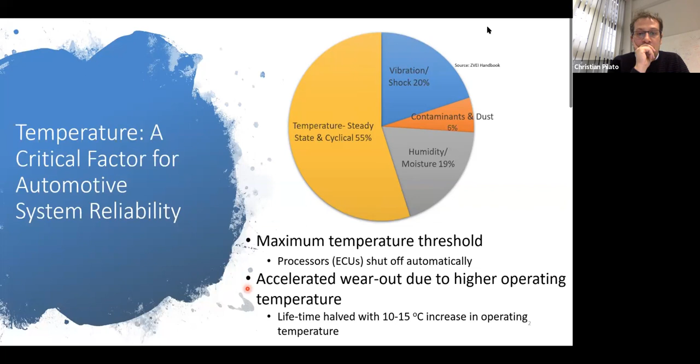So there are two aspects. First, when the maximum temperature threshold is reached by the processor or ECU, it is automatically shut down. Suppose we consider a brake-by-wire system: if you press the brake pedal and that ECU is already shut down, you will not be able to apply the brakes, and you will face a major consequence. Second, if high temperature persists, it will accelerate the wear-out mechanism and reduce the lifetime of the device.

So in this research we consider different problems: how to guarantee peak temperature, how to optimize latency, temperature, and system-level reliability. We have contributed a mathematical model for thermal behavior, and we have considered a genetic method for peak temperature bounding and efficient system-level MTTF calculations.

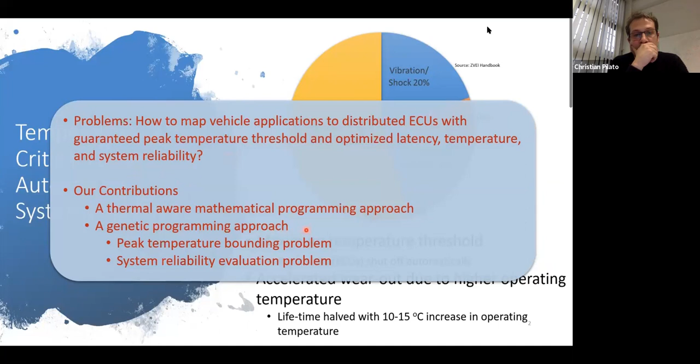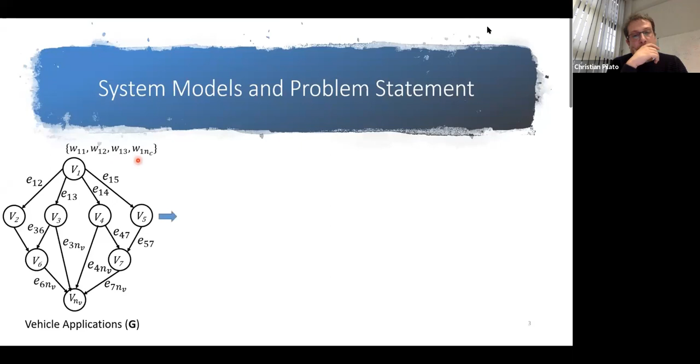For our system models, we model the vehicle application with a task graph, where each node represents a task and each edge represents the worst-case communication cost between two tasks. For each task node, we have different worst-case execution times on different ECUs. We want to map this task graph onto the heterogeneous ECU architecture.

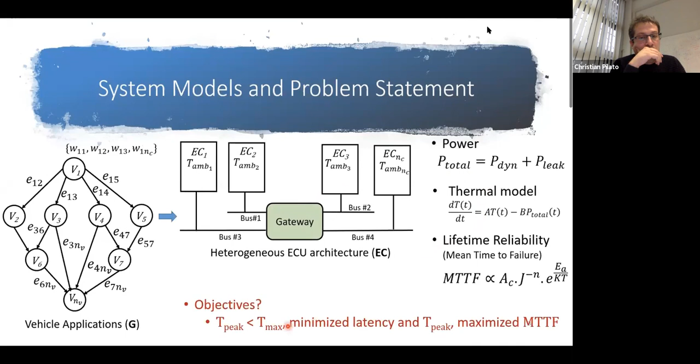We consider total power as a combination of dynamic power and leakage power. We have considered a conventional RC thermal model. We model lifetime reliability as mean time to failure for electromigration. We consider this problem statement: guarantee peak temperature below threshold, minimize latency, minimize peak temperature, and maximize the MTTF.

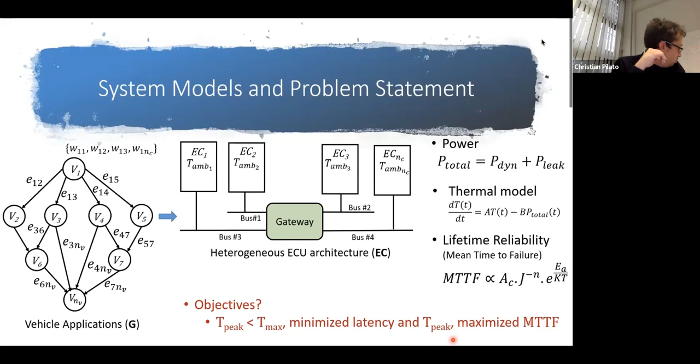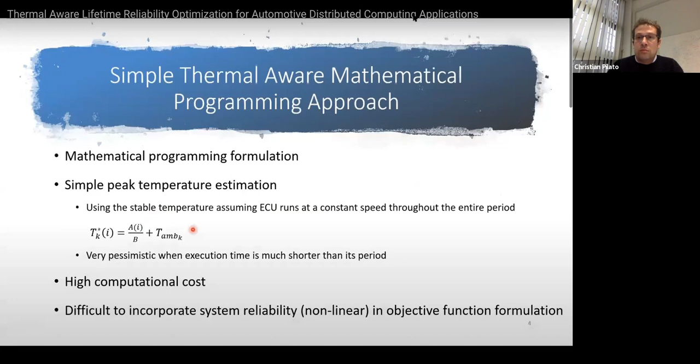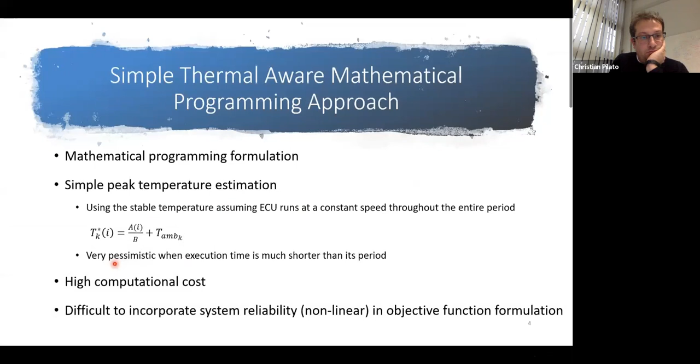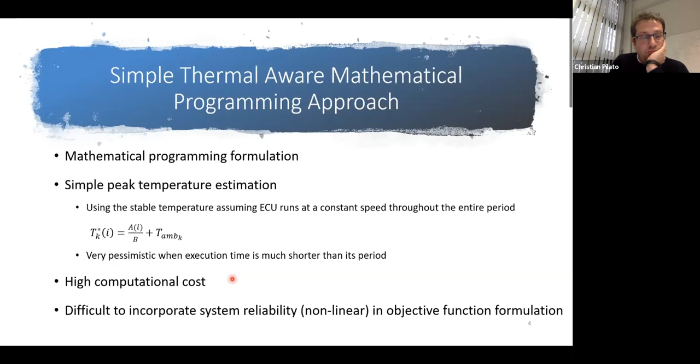So this is our first contribution. Here we have presented a mathematical program for simple thermal behavior, where we consider a constant stable-state temperature for each task and then find the temperature bound. Later on we found that it's a very pessimistic approach when execution times of tasks are shorter compared to the period. Also, it takes a lot of computational time and it's really difficult to incorporate system-level reliability in the model due to its non-linear nature.

To overcome these problems, we decided to go with the genetic programming method. There we consider two problems: how to bound the peak temperature and how to calculate system-level MTTF more efficiently.

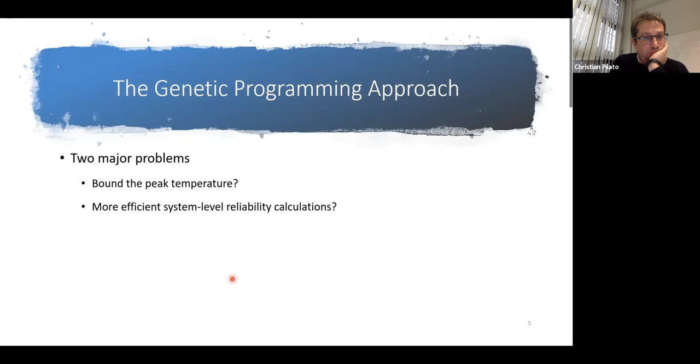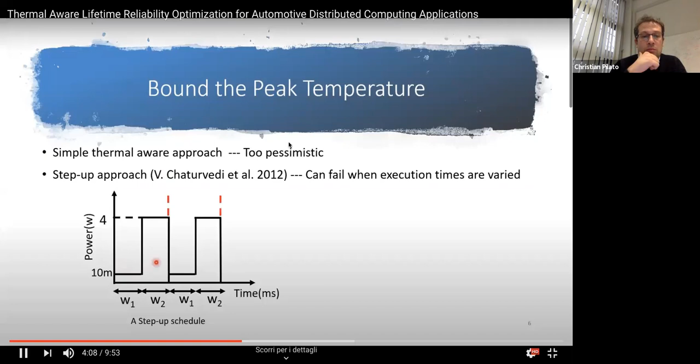The peak temperature bounding simple thermal approach that we considered before is very pessimistic. There is one more approach in the literature, the step-up schedule, but it fails sometimes. Let's see with an example: this is a two-task step-up schedule for two periods. From the experimental setup, we get a peak temperature at this point. Now the idea is, if the execution time of task 1 is nearby zero in the second period, we get a schedule like this, and we get a peak temperature of 94.02 degrees Celsius, which is higher than the peak temperature bound given by the step-up schedule. So it's a failure of the step-up schedule.

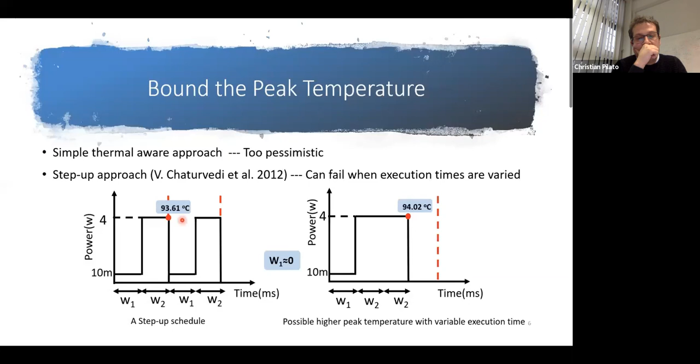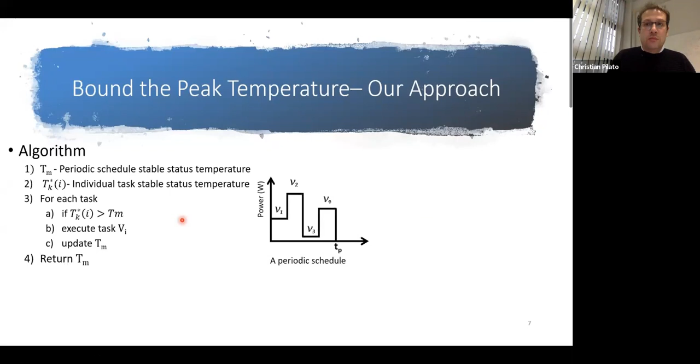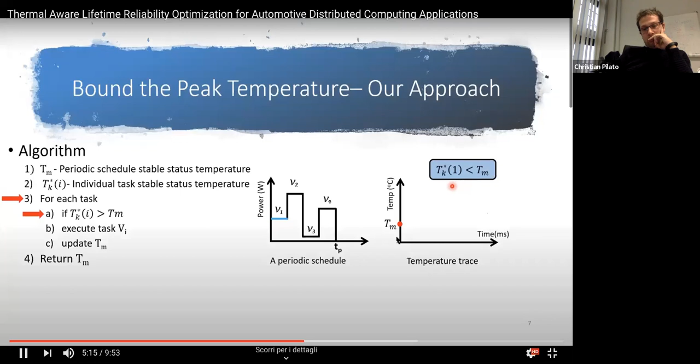To overcome this problem, we have presented this algorithm. Let's understand with an example. Suppose we have a periodic schedule of 4 tasks. As per the first step, let's calculate the stable-state temperature Tm. Second step, calculate individual task stable-state temperatures. Now for each task, let's say task V1 comes, we compare its temperature with Tm. Suppose it is below, so we skip this task and go to task V2. Again compare the temperature; suppose it is above Tm, so as per this step we execute and update the value of Tm.

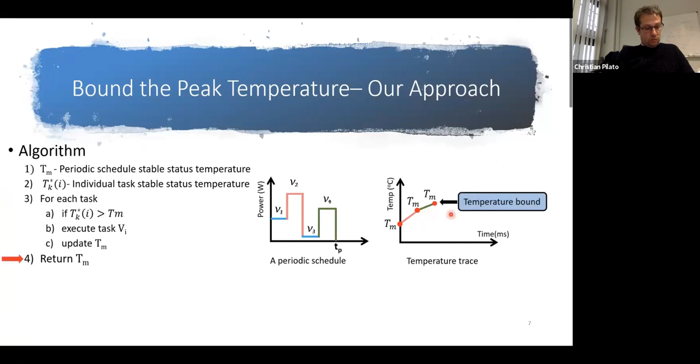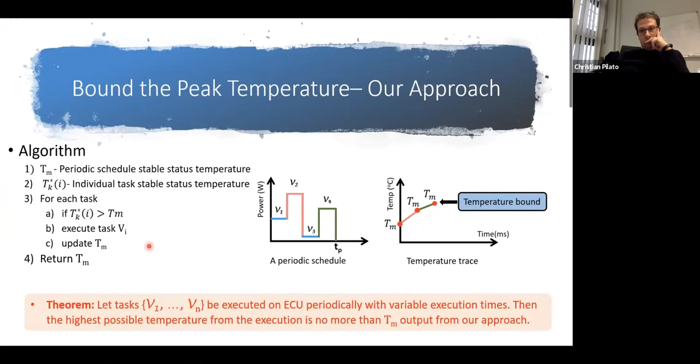Then comes task number 3. Its temperature is below Tm, this updated Tm, so we don't consider this task, and then we go for task number 4. Suppose its temperature is greater than the updated Tm, so we execute this task, update the value of Tm, and then go for the next step. This gives the temperature bound because task 4 is our last task. We have proved this theorem. It guarantees that the peak temperature bound given by this algorithm is high enough to bound variable execution time scenarios.

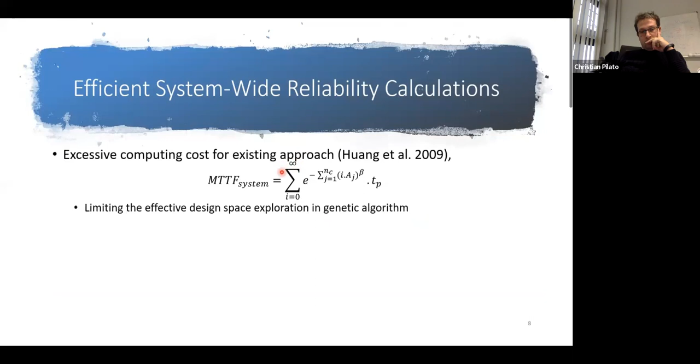Efficient system-wide reliability calculations - this is the existing model. It runs from 0 to infinity, and therefore it consumes a lot of computational time, and it limits the design space exploration. To overcome this problem, we have proposed this new model. It's a very efficient model in terms of time. It's a closed form, and the error between this model and the existing one is just below 0.1%.

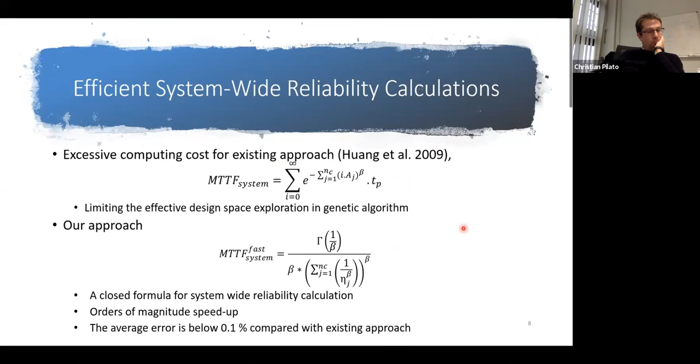Our experimental setup: we have considered 3 ECUs with different ambient temperatures. We have generated task graphs randomly for 10, 15, 20 and 25 tasks. Our power consumption is in this range.

Our testing approaches: we have considered mathematical program for temperature oblivious, where no thermal behavior is considered. Simple thermal approach, where we have proposed earlier. Then we have genetic algorithm for peak temperature bounding proposed, as well as fast MTTF calculations that we have proposed. And the last is again genetic algorithm with the peak temperature bounding that we have proposed, along with the existing MTTF calculations - we call it traditional MTTF calculations.

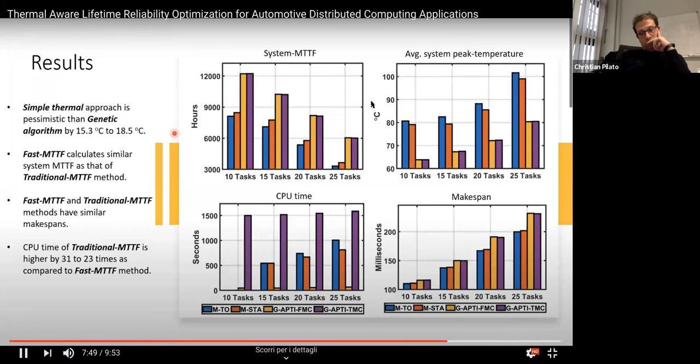So these are our experiment results. Let's see the peak temperature of simple thermal approach, shown in orange color. If you see with these proposed temperature bounding mechanisms, this simple thermal approach has very high peak temperature in all the test cases, so it's really pessimistic.

In terms of MTTF, the method that we have proposed for MTTF calculation and the existing method have almost similar MTTF values for all the task cases. For makespan, the method that we have proposed and the existing one have almost similar makespan - you may observe this for all the cases. But there is a big significant improvement in CPU time for our proposed MTTF calculations as compared with the existing method. You can observe it for all the cases.

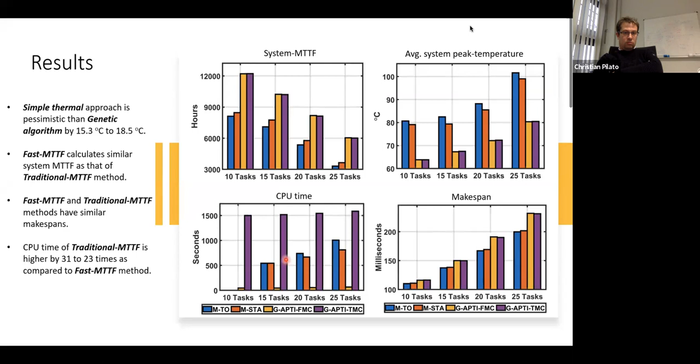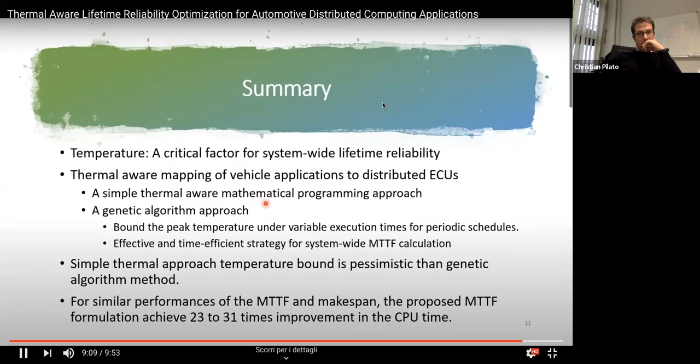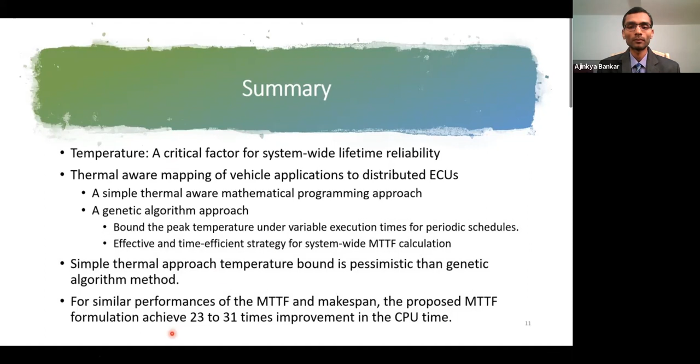So in summary, temperature is a critical factor for system level reliability. We have considered mapping of the vehicle application to heterogeneous ECU architecture. We have proposed a mathematical program; to overcome its drawback, we have proposed a genetic algorithm where we bound the peak temperature very efficiently. Then we have proposed a time efficient method to calculate system level reliability. From our experimental results, we find that the simple thermal approach temperature bound is pessimistic as compared to what we have proposed and used in the genetic algorithm. And for similar performances of MTTF and makespan, our proposed MTTF formulation achieves a significant improvement in CPU time.

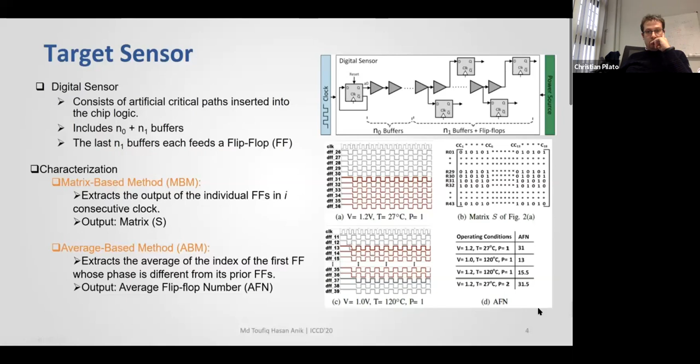Here it extracts the index of the first flip-flop whose phase is different from its previous flip-flops, and then generates the average flip-flop number as AFN. Here you can see that the first phase change is happening at flip-flop 31 for all clock cycles, so the AFN is 31. In this example, it can also experience multiple phase changes, but we consider only the first change, and we found the AFN is 13.

Therefore, we use a dual sensor that operates under the same temperature. However, the VDD of one has a constant shift compared to the other. Then based on the outcome of these two sensors, we can find the voltage and temperature accurately.

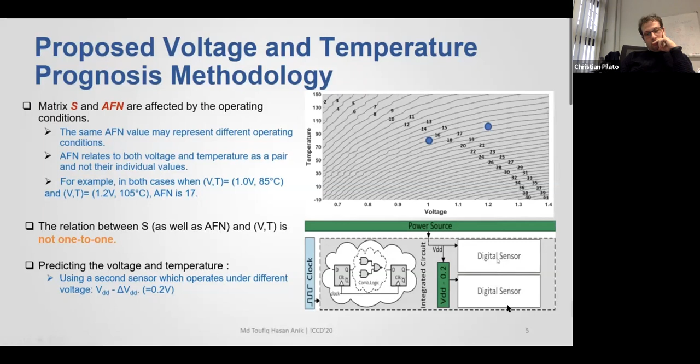This is the setup we use for our experiment. We use simulation data for training the neural network, and we extract the outcome of the sensor during runtime and use it for predicting V and T.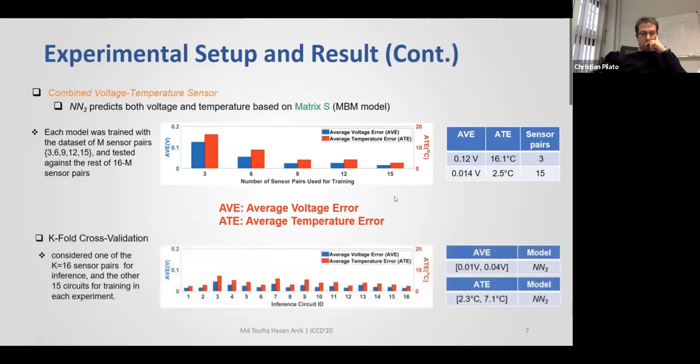We also use NN3, which predicts both voltage and temperature based on the matrix S. Results show that when trained with 15 sensors, the average voltage error goes to 0.014 volt, and average temperature error goes to 2.5 degrees Celsius. Also, k-fold cross validation shows that results are stable over different sensors.

To summarize, anomalies can be detected via sensing circuit operating conditions. The digital sensor associated with neural network can predict voltage and temperature. Results show that process variation does not impact the assessment, and voltage and temperature can be predicted with good accuracy with this framework. Thanks for your patience, please drop your questions, we will be happy to reply soon. Thank you.

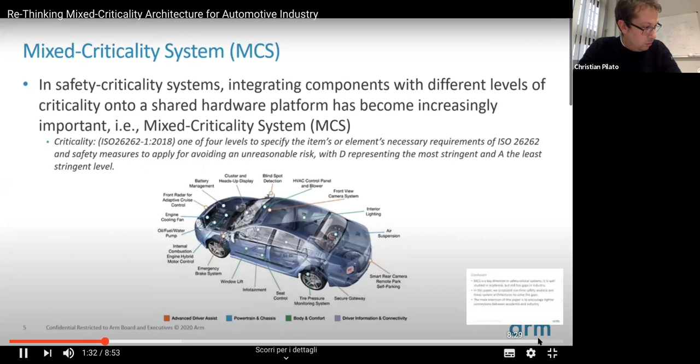Take automotive systems as an example. Nowadays, the electronic system in a vehicle is very complicated, which can be simply classified into chassis control, body control, and driver information systems. In industry, the development of these functionalities is under different requirements, which is also called different criticality levels. Currently, these different criticality functions are implemented in separate chips. They are more like a distributed system.

However, the main trend of the future is integrating all these functionalities into a single chip. This is mixed criticality system.

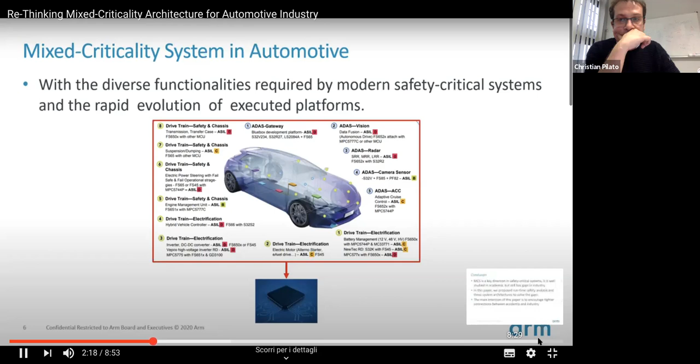Nowadays, MCS is well studied in academia, but is difficult to implement in industry, as the theoretical models do not always consider industry standards and practice.

Now let's see the state of the art in academia. The state of the art research regarding MCS is triggered by the real-time system community, in which meeting real-time requirements is key. To meet the real-time requirement, getting an accurate WCET is the first step. WCET means the worst-case execution time.

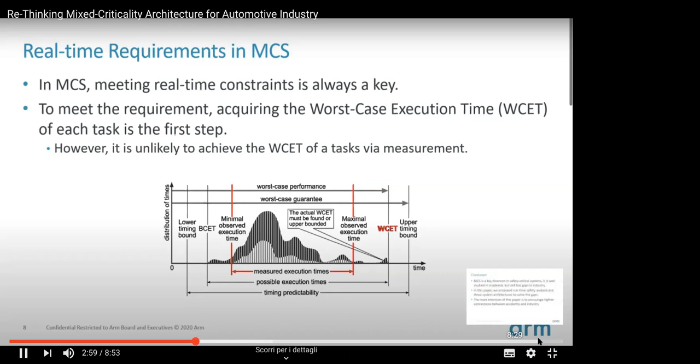Here we have a diagram to show the WCET of a task. As shown by this diagram, it is very unlikely to achieve the WCET of a task during measurement. In MCS, WCET is normally predicted with different levels of confidence.

It can be high confidence, which is pessimistic and safe, but wastes system resources. It can also be low confidence, which is optimistic and saves system resources, but is risky and dangerous. Note that here we only talk about 2 criticality levels. In practice, we may have 3 or 4 criticality levels.

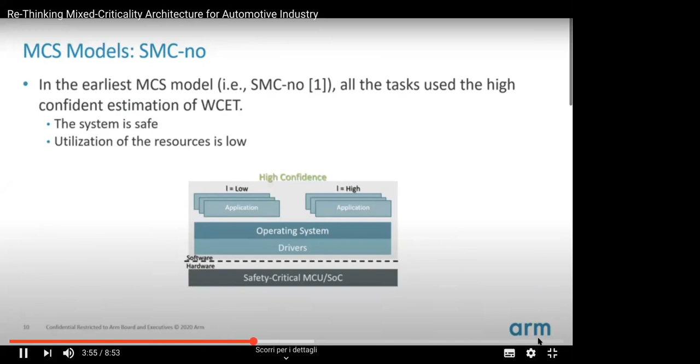The earliest methodology of MCS is provided by Vestal, an expert from Honeywell. He adopted a very conservative system model, which lets the system always run in a high confidence mode. This means the system is safe, but the utilization of resources is very low.

Recently, the most popular MCS model brings the concept of the system mode switch. So what is the system mode switch? The system starts at the low criticality mode, which is not confident but efficient. When something goes wrong, for example a fault or task over-execution, the system will change to high criticality mode, and the low criticality tasks will be terminated in order to guarantee the correct execution of the high criticality tasks.

In order to achieve the system mode switch, a system monitor is definitely required. It can be implemented in an operating system or independently. In academia, a lot of theoretic analysis is ongoing with this model, for example how to make the schedulability analysis accurate, or how to improve the model. However, in industry, how to build such an MCS is still a problem.

Now let's discuss these problems. These problems are mainly caused by different mismatches. The first mismatch is related to the mode switch. As we mentioned, mode switch is the key strategy in MCS. However, as per industry state of the art, triggering a mode switch based solely on task criticality levels is not correct, since the criticality level of a task is determined by multiple factors.

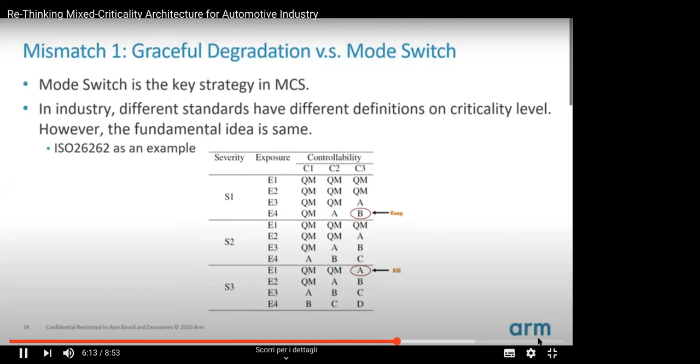Here we have an example of ISO 26262, which is the safety standard for the automotive industry. According to ISO, the criticality level of a task is determined by severity, exposure, and controllability. However, only severity determines the result of terminating a task. For example, it is possible to terminate a low criticality task with high severity and preserve a high criticality task with low severity.

Secondly, dependency is also taken into account. If a high criticality task depends on the result from a low criticality task, during the mode switch, if we terminate the low criticality task, the high criticality task will also execute wrongly.

At last, isolation must also be taken into consideration. As regulated by ISO, different criticality components must be isolated, which avoids fault propagation between different critical components.

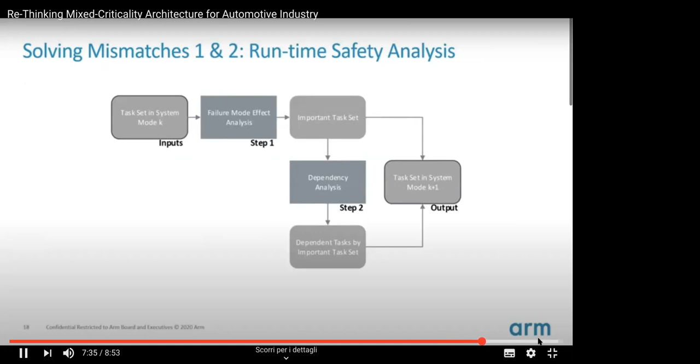In this paper, we propose ZMCS, which focuses on the 3 key mismatches between academia and industry in MCS. To solve mismatches 1 and 2, we provided a run-time safety analysis, which must be executed before a mode switch. The safety analysis ensures we terminate the correct functions and tasks during a mode switch and preserve the correct functions.

Moreover, we also provided 3 potential solutions for mixed criticality architecture: a software virtualized system, an ARM TrustZone-based system, and a hardware-assisted system. These are specifically introduced and compared in our paper. Due to time limits, we will not go through the details of these designs, but I'm very happy to talk about them offline, so feel free to ask any questions regarding the design details.

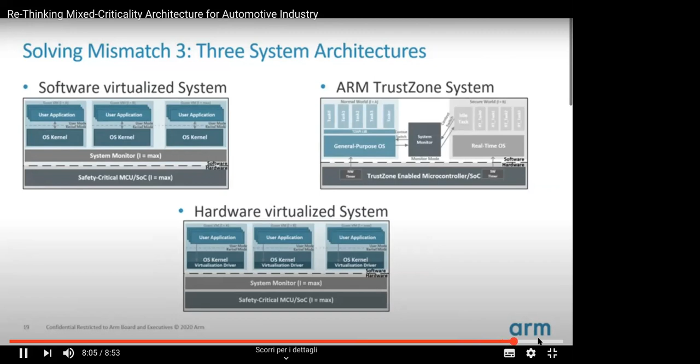To conclude, MCS is a key direction in safety-critical systems. It is well studied in academia, but still has gaps in industry. In this paper, we propose runtime safety analysis and 3 system architectures to solve these gaps. The main intention of this paper is to encourage more frequent and tighter connections between academia and industry.

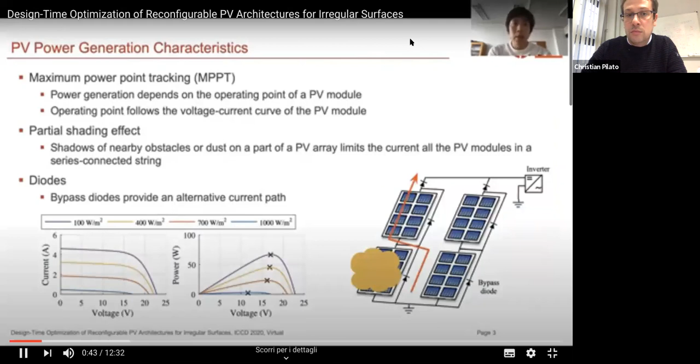There are certain characteristics in PV power generation, and therefore PV arrays require a technique called maximum power point tracking to let them operate in the efficient region. However, there are effects such as partial shading, where shadows of nearby obstacles or dust on part of a PV array limits the current of all PV modules in a series-connected string, as shown in the bottom right corner. In this figure, the bottom left panel is covered with dust and unable to generate electrical current. The PV module connected in series receives enough sunlight but is still unable to generate electrical current. To avoid that, bypass diodes could provide an alternative current path, as shown by the red arrow.

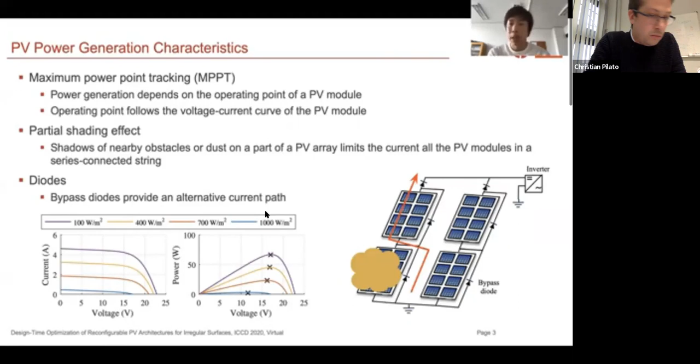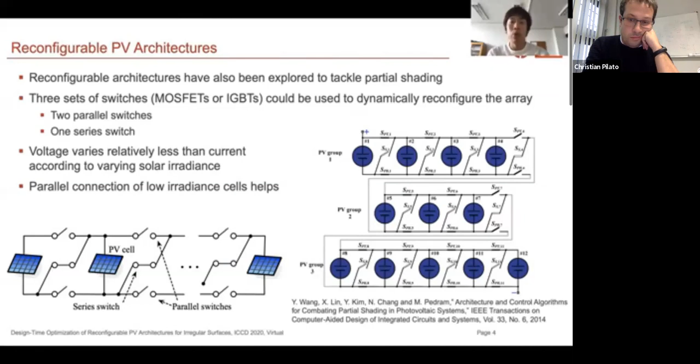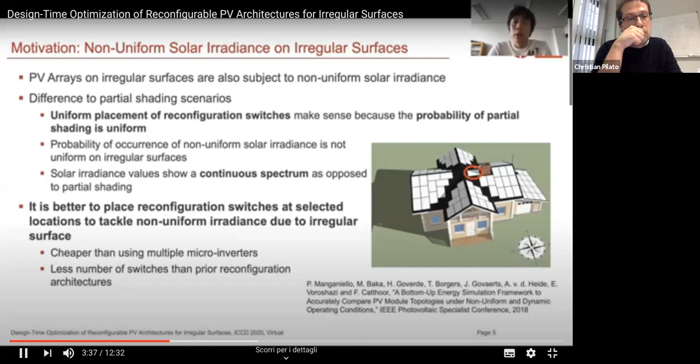So it is better to place reconfiguration switches at selected locations to tackle the non-uniform irradiance due to irregular surfaces. This will provide a cheaper solution than using multiple microinverters, and requires fewer switches than prior reconfiguration architectures tackling partial shading.

Here I will state the problem of PV reconfiguration switch location determination. The objective is to maximize the power generation of a PV array for a given set of light sources. It can be described as follows.

P average is the mean of the maximum power points for n different light sources. The control knobs are the atomic unit size determination and the placement of reconfiguration switches, which will divide those atomic units. Inputs for the problem are solar irradiance angles and the shape of the surface.

Then there are constraints on the number of cells in series, which will help in achieving the input range constraint from the inverter side, and a constraint on the number of reconfiguration switches. So once the number of reconfiguration switches is given, we determine the optimal placement of those switches.

Flexibility of reconfiguration is crucial in adapting to different solar irradiance scenarios. For example, if 120 cells or modules were to be configured into 10 groups of equal size, meaning there are 9 reconfiguration switch sets in between each group, there are 6 ways to do so.

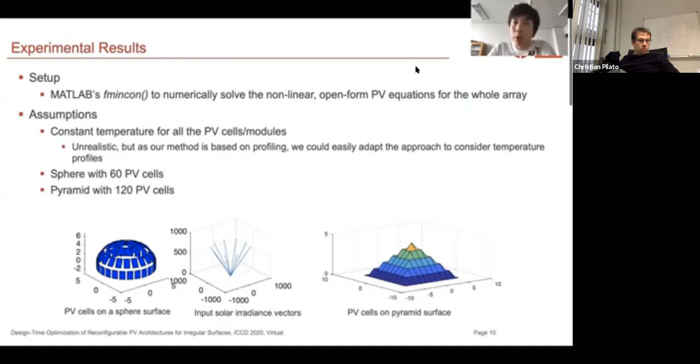One unrealistic assumption is that we assume constant temperature for all the PV cells and modules, but since our method is based on profiling, we could easily adapt the approach to consider temperature profiles.